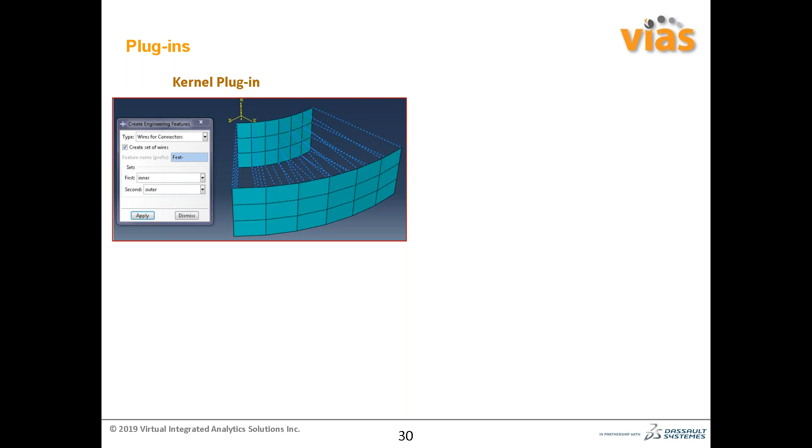Now, when talking about plugins, there are two different kinds. One is the kernel plugin, and the example we are seeing is basically a point-to-point connector. The other is called a GUI plugin, which is a plugin of adjustable rigid torus, or shortly ART. It enables you to define and visualize an adjustable rigid surface in the shape of either a torus or a cylinder. You can develop either kind of plugin, and they have different applications.

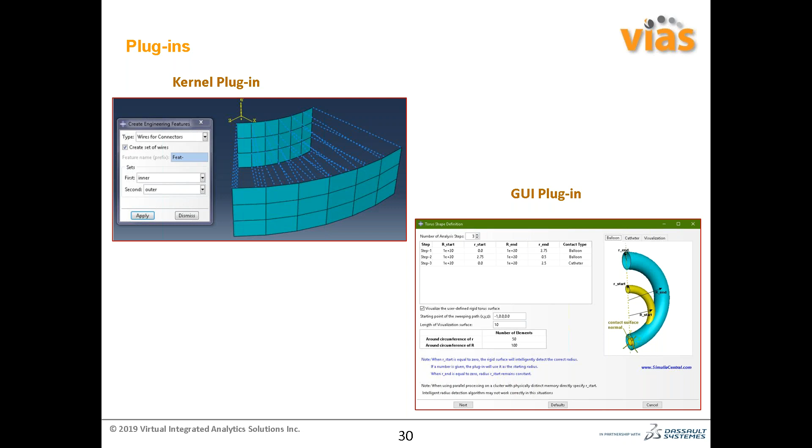So in Dassault Systèmes client care, There is a knowledge base article where you can get all the plugin lists on one page, and you can directly download those plugins and use them for your automation task.

Also, Python script can be used in the Abaqus environment file. If you want to customize your Abaqus CAE session, you can invoke Python scripting inside the environment file. For example, I have a Python file called my_material_library.py, in which we have defined a particular material. If you invoke this command inside the Abaqus environment file, then once you open Abaqus, by default a material will be created automatically.

Now we'll talk about the RSG Builder. RSG stands for Really Simple GUI. In Abaqus CAE, in the plugins menu, if you go through Abaqus and RSG Dialog Builder, you get access to the RSG dialog box, which basically helps you create a GUI interface for a particular script.

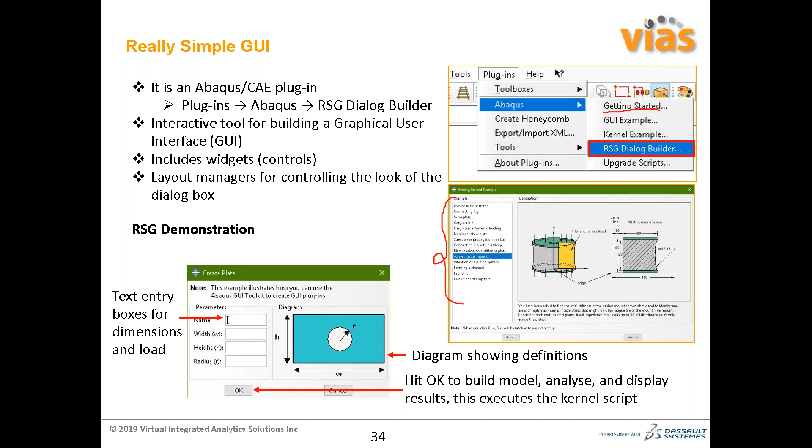Now, the main steps when creating a GUI-based plugin: first, you create an Abaqus CAE model and save it. Once you save it, all the commands you've executed in Abaqus CAE get saved in the replay file.

Then you can copy the replay file, edit it, and directly open the RSG Builder. In the RSG Builder dialog box, you create your custom GUI. After creating your custom GUI, you link your Python file within the RSG plugin, then save the plugin and copy it into the same folder as the Abaqus plugin folder, from where all the scripts and plugins are stored. Now, if you open Abaqus, you should see the plugin.

I will show you a very quick demo of this. Let me take you through it. So, first I am setting a working directory. This is my working directory. Now I create a part.

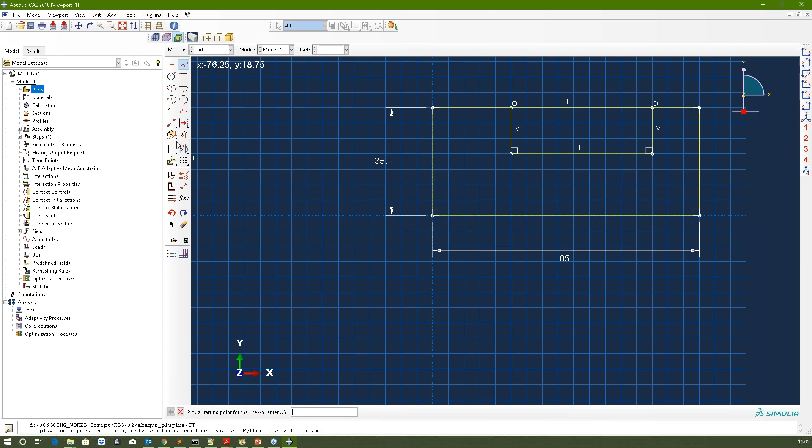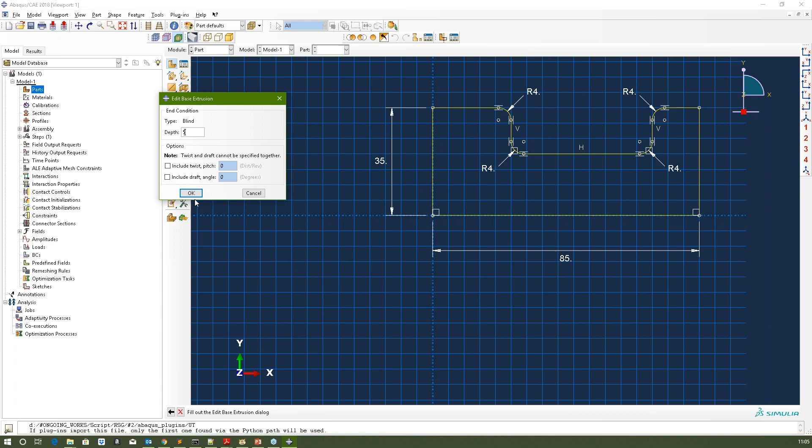So I'm just putting some fillet over here, like this simple tensile specimen, I can say. And I can just extrude it for 5 millimeters, like that. I can define a material property.

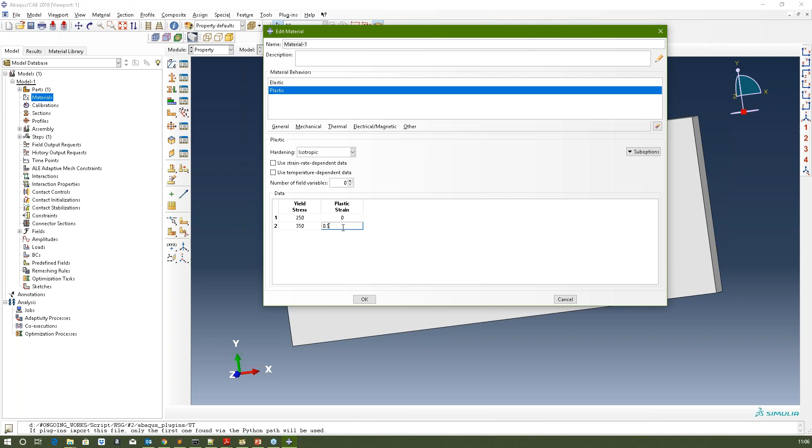Now I'm defining a section. I'm assigning the section to this one. Now I'm creating an assembly of the same part.

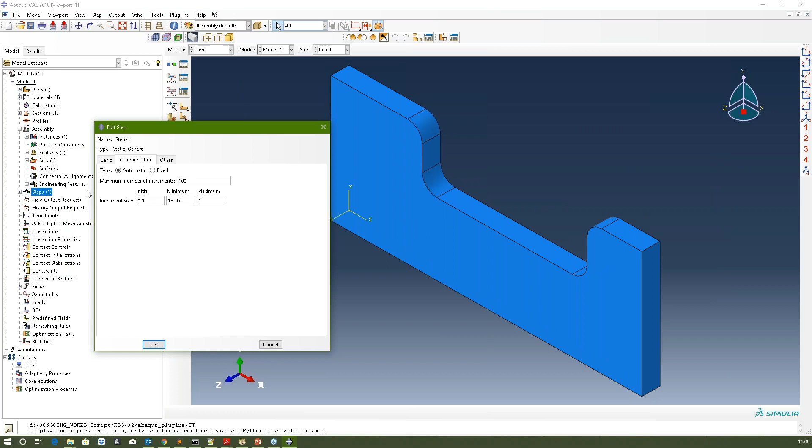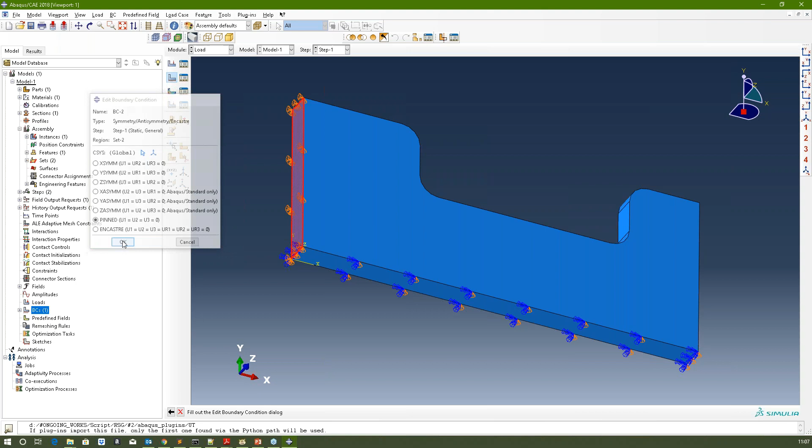Now I'm defining a static analysis step, and I'm defining a boundary condition of symmetry on this face. I'm defining a pin boundary condition here, and I'm prescribing a displacement on the other side of the part.

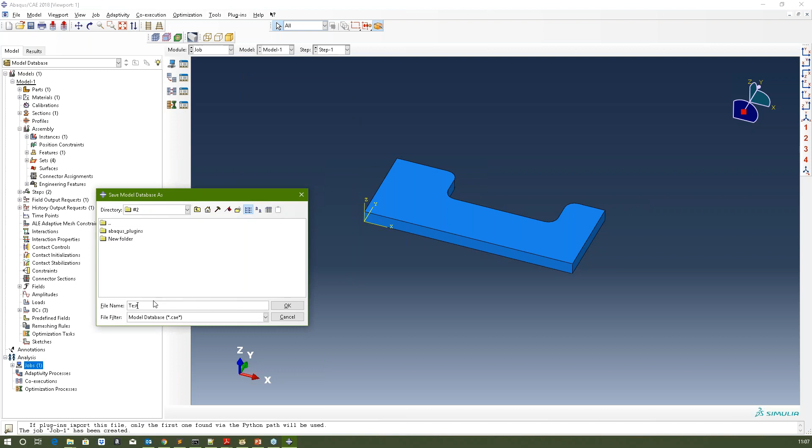And I'm creating a job. So once I save this one, a Python file will be created automatically, and a replay file will be created automatically.

So this is the replay file you can see here. What I need to do is basically remove all the parts up to executeOnCaeStartup.

I can just define a function, like say, and I can define the variables like length, width, and P_Load. And I'll be basically importing the modules here.

Now you see here, I basically need to connect this length, width, and P_Load to these certain parameters. So when we are defining the rectangle, you see here, these are the points we are defining. So here I can directly specify length and width, L comma W. And for the load, we have defined in the load module, I mean the displacement directly.

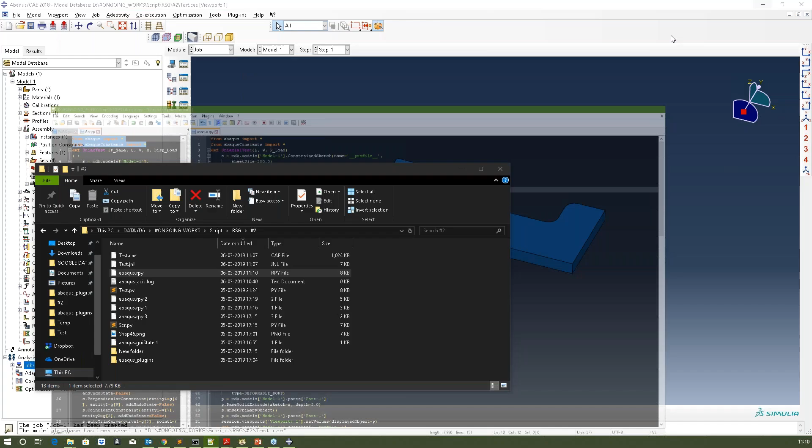Now I'll save this one, and I'll copy this one to a new name, and the extension will be a py file. Now I'll go to the plugins, then Abaqus, then RSG dialog builder.

So this is basically a uniaxial tensile test specimen. And here I can include this one and you can see how it looks like when you are building. So I can include different inputs. So this is basically like length, and this is a float, and the corresponding keyword is L, and I can say the default value is something like 90. Then I can define the width.

This is also another float, and this is like 35, and this one is something like, I'll say it's a displacement load, and this is also a float, and the corresponding keyword is P_Load, and I can give it a value like 10. So once I have done this one,

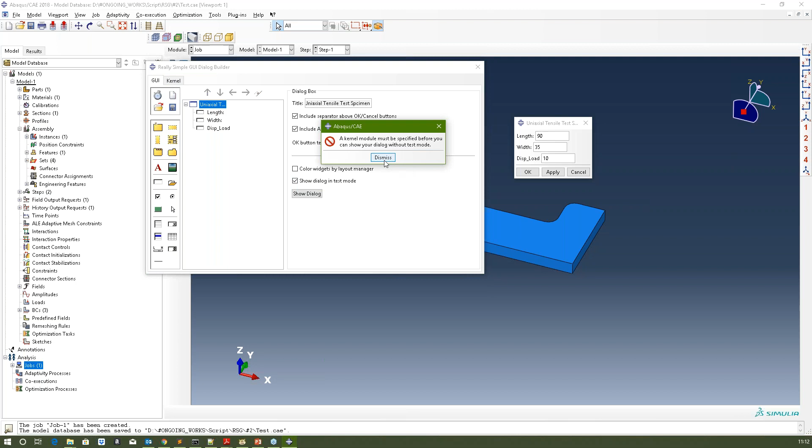I can go to this one and I can just switch the show dialog in text mode. Okay, so before that, what I need to do is go to the kernel, and there I need to connect this particular GUI to the corresponding Python file. So what I need to do is pick this Test.py, and you can see this is how it looks like, and inside that this is the function, and I can add an icon as well if you want, like the icon could be something like, I can just pick some picture here.

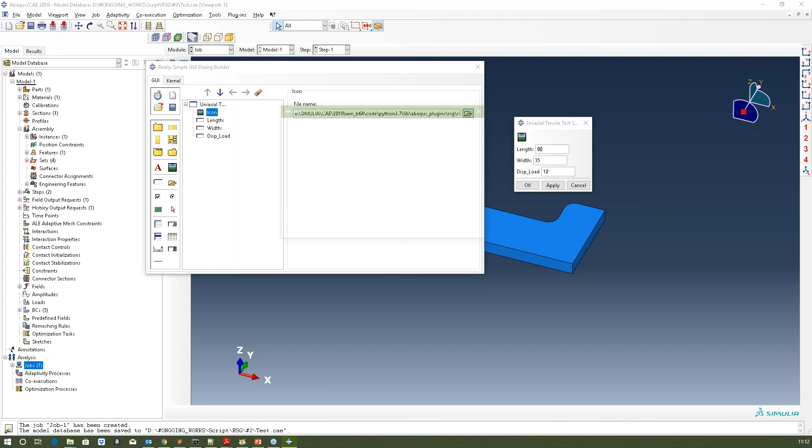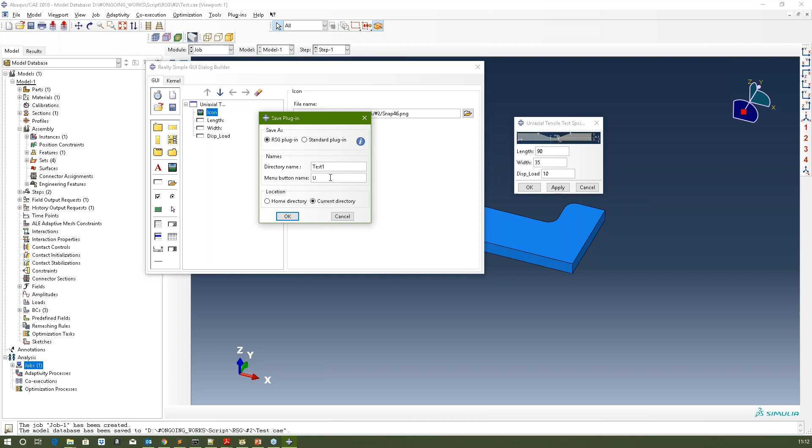Okay, so once this is done, you can save this one. You can save this one with a directory like inside the working directory. I'll say it in current directory. Just give some menu button like UT. So once you say this one, it will be saved inside the working directory. Now I can easily close this one.

So you can see that inside that one there is a particular plugin written like UT, or sorry, test one is written. So inside that you can see the corresponding plugins is there. So now once you're having this plugin, you can directly copy this plugin in the Abaqus plugin folder.

And you can paste it here. Once you are pasting and restarting your Abaqus, you will be able to see your corresponding plugin here in the plugins unit test. And this is how it looks like.

Okay, so this is the way how you basically build plugins. I have given an additional name like part one, but this is not connected here, that's why it is creating some issue. When you are using a part name like p_name, you have to include it in every location. Wherever the instance is happening, you need to replace it by using the p_name.

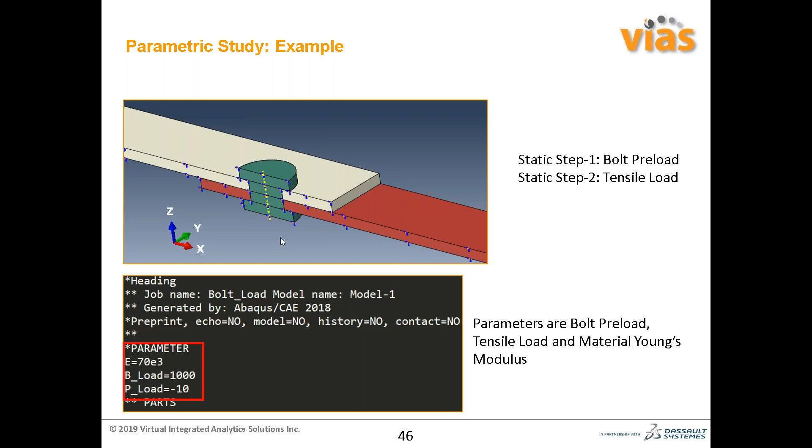And this is a similar example of the same study. So here you can see that I am creating a parametric study file. It is very straightforward and simple. If you go to the Abaqus documentation, you can get lots of examples on this. So the function name is the base study, and this is the parametric study, and the parameters are E, bolt load, and P load.